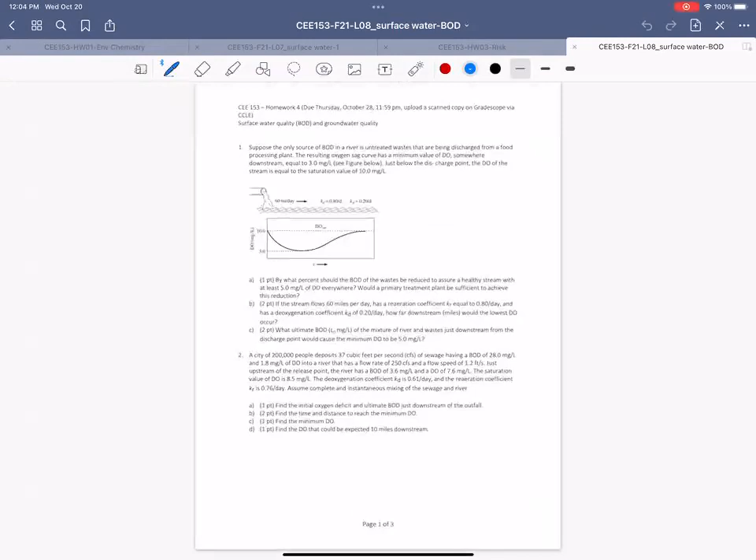And this is the homework. It's very hard to see here on the screen, but I just want to say that this is uploaded. These are all based on BOD. This is groundwater. This is also groundwater questions. So those questions, you know how to solve after Monday class.

All right, so the reason we do BOD is for this question. The picture that you see over here describes what happens if you have lots of wastewater or waste dumping into a river. As you can see, fish in the very left corner are very happy because they have enough oxygen. There are different kinds of fish, everybody's thriving there. But the moment you discharge some waste, those wastes have so much BOD that microorganisms will eat that BOD. In the process,

There is a noise here. It's for me. Yes, because of probably this. See, sometimes it happens, sometimes it doesn't. Try to put it at the bottom. It's a noise from the microphone.

All right, so as you can see over here, the moment you add more BOD, or waste that has lots of oxygen demand, the oxygen concentration is going to decrease, and a lot of fish will not survive. Only the bottom feeders, the fish that thrive eating the mud or things in the mud, will survive because they don't need that much oxygen. But all the other types of fish will die.

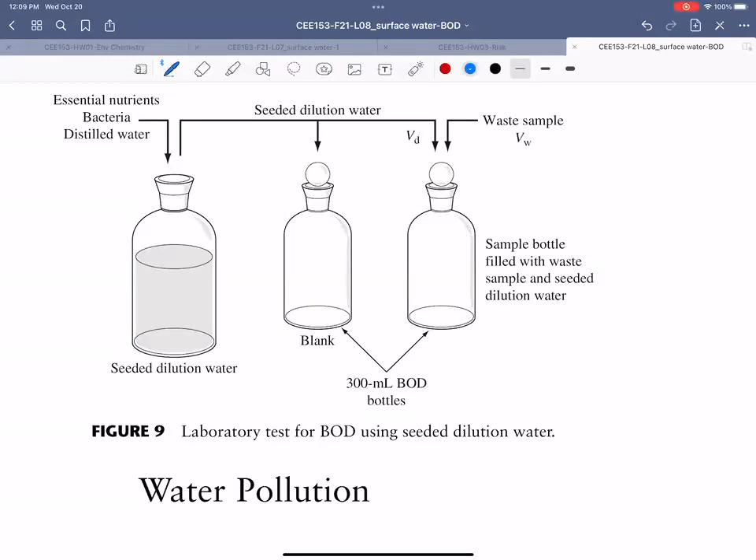The BOD test is basically: you take the waste, you don't know how much BOD is there. You start the test, and you measure how much dissolved oxygen is used up in 5 days. The dissolved oxygen used up is proportional to the BOD used up during that time. So you can calculate the amount of BOD based on the amount of dissolved oxygen used up, and that is the amount of BOD used up during that time.

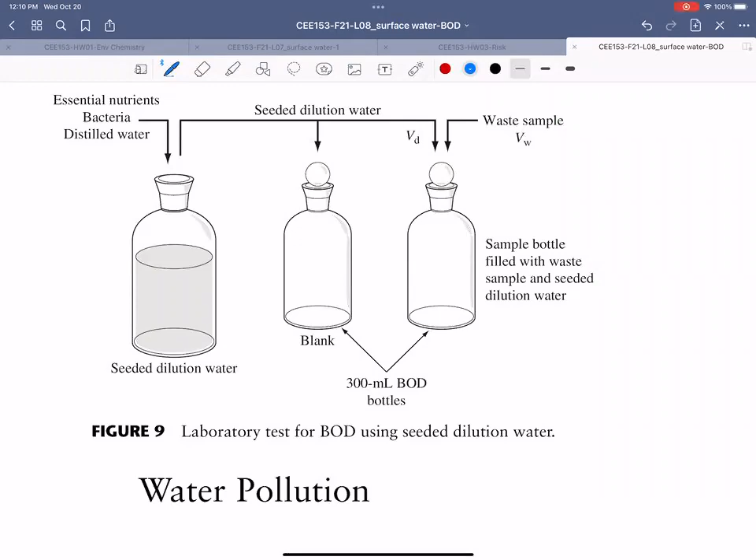But how do you know exactly what the BOD was before that? That's the first challenge. The only thing you can measure is how much BOD changed, not what was initially there. So you need some kind of equation to predict what was initially there. It turns out it's a first order differential equation, a first order rate, something you already solved. So I'm going to show how it is done, so you can use it a lot of times.

Every time you see BOD 5, that means BOD used up in 5 days. It's not the BOD concentration in water. That's the biggest mistake most students make in the exam. I give BOD 5, they assume this is the BOD in water. This is not the same thing. BOD 5 means they take that water, do the testing, and see how much BOD is used up in 5 days. So you can use that to predict the initial BOD. That's the first thing you have to change in your problem.

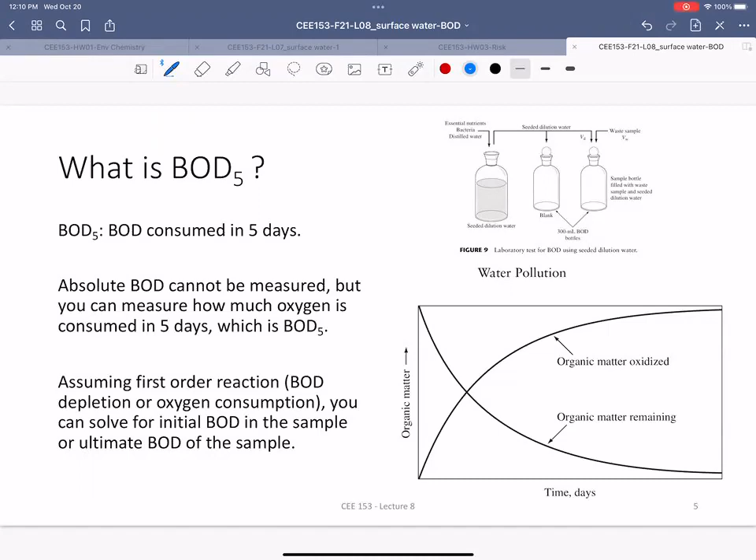So again, absolute BOD cannot be measured. You can only estimate it based on how much BOD is consumed in 5 days. So the BOD 5 test is the only test you can use to predict that BOD. So let's see how to do it. Modeling BOD reactions: the assumption is this is first order.

The amount of dissolved oxygen used up is the same as the amount of BOD consumed. Okay. So whatever amount of oxygen is used up must be because of the BOD depleted during that time, or BOD oxidized. The amount of BOD oxidized is basically the change in BOD concentration with time.

So you can write that as BOD at time equal to 0 minus BOD at time t, over t minus 0, the difference in time. Sorry, I'm writing it. It can be any time, but most BOD tests are only 5 days. So all we are measuring is the difference in BOD over 5 days based on the oxygen. So what you are measuring here is oxygen.

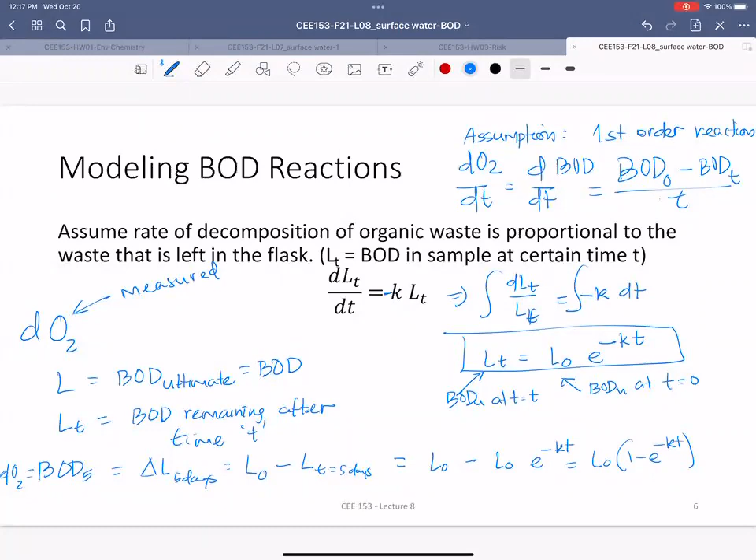So if you put it here, BOD5 is L0 minus L0 e to the minus kt. So if you take L0 common, you get L0 times 1 minus e to the minus kt. So why is it important? Now this entire expression can relate BOD5 with your initial BOD L0. Okay, so that means if the BOD5 is given and I ask the question, what's the amount of BOD initially present in the water? You can calculate L0. Okay, so the equation that you always use if the BOD is given: L0 is BOD5 divided by 1 minus e to the minus kt, and t equal to 5 days here. Okay.

So many short questions will give BOD5. You are asked to calculate this, or you will be given this one and you are asked to calculate BOD5. Everything else will be given, right? k is always given. And the important thing is the unit of k should be 1/day. Okay, that's the unit of k, because here the time is in days. So if the unit is given in a different time, let's say hour, you have to change to day to use that equation.

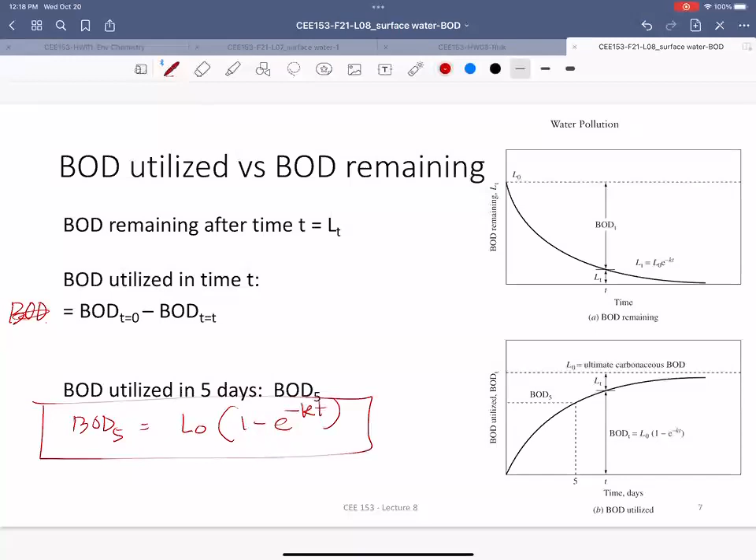So this is already derived. So BOD utilized in time t is the same as BOD5. So if you use this equation, BOD5 is this, and if you plot this equation, this is the amount of BOD in water at different time. It's decreasing with time exponentially because of these equations. And this is the BOD utilized, or amount of BOD used up. Initially 0, then it's increasing with time. If t equal to 5, that's a special case: what is the amount of BOD used up in 5 days? All right, so the only equation you have to remember is this. Everything else you already know.

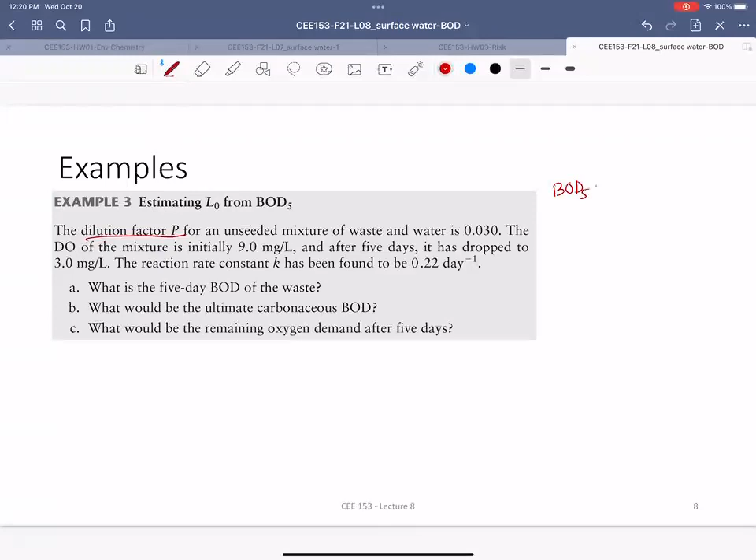I'm just going to write that equation there so that you know what equation to use. So BOD5 is DO initial minus dissolved oxygen final divided by dilution factor. So this is P. Everything else is given. DO initial is 9 milligram per liter. DO after 5 days has dropped to 3.0 milligram per liter. That's DO final. Divided by P, which is 0.03. So that would be 6 divided by 0.03 milligram per liter. So that's 200.

So all it means is that in 5 days in that test, 200 milligram per liter of BOD is consumed, which is basically equivalent to DO. 200 milligram per liter DO is consumed. Okay. So we express BOD as dissolved oxygen because you can't really have molecular structures or a specific formula.

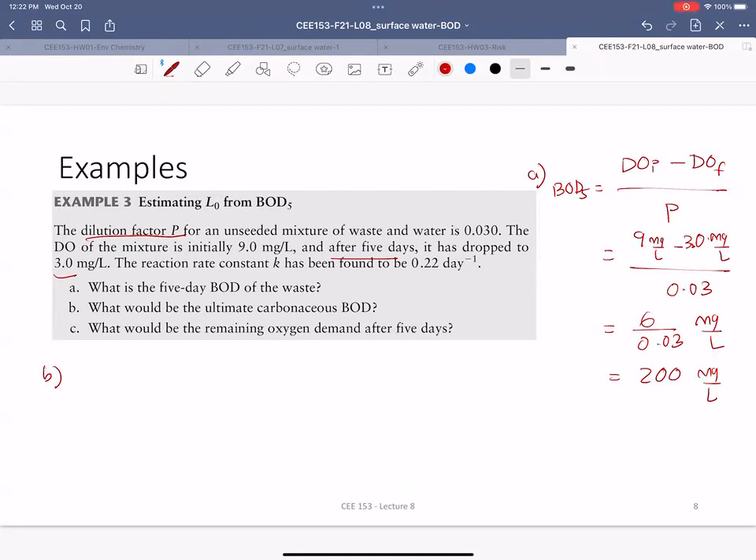Let's solve question B. What would be the ultimate BOD? Anytime you see ultimate, that's basically asking what is the initial BOD. So I'm asking you what L0 is. You know L0 is BOD5 over 1 minus e to the power minus k times 5 days. So that will be 200 milligram per liter.

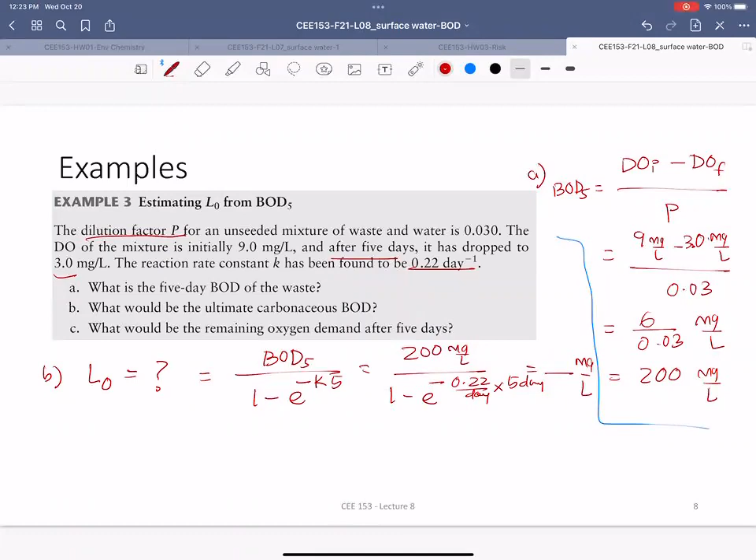K is given, 0.22 per day, and this is 5 days. So I'll get the answer in milligram per liter. So again, anytime you see ultimate BOD, that's basically asking what is the concentration of BOD in water, not what is consumed in 5 days. So this is basically, before the test started, what was the initial BOD.

Number C, what would be the remaining oxygen demand after 5 days? So it's asking how much BOD remains in water after 5 days. L0 is the starting point, initial. What is LT at 5 days? Well, that's easy. You know what is initial and how much you consumed. So if you subtract BOD5, whatever was consumed in 5 days, from the initial, you get what was remaining.

But another way you can write it: this equation is the same, because you know the BOD decreases with an exponential function from the initial number, and if you put this value in, you can see it comes out the same way. So BOD5 is L0 times 1 minus e to the minus k times 5, that's the BOD5 expression.

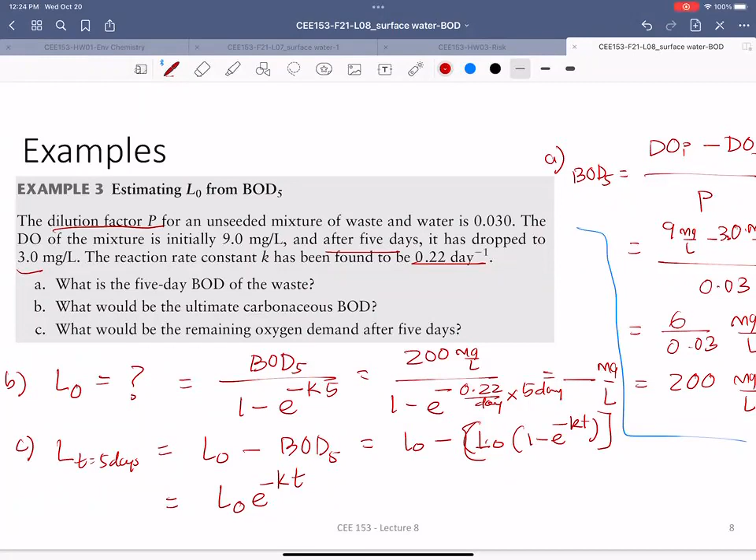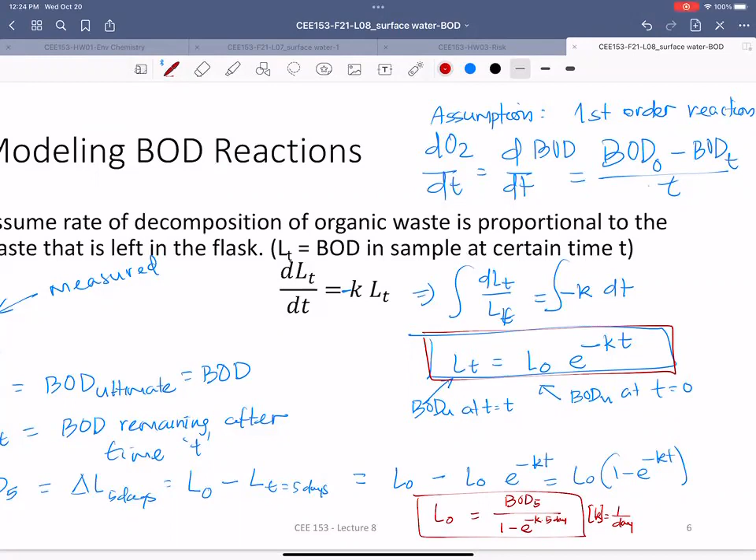If you put that value in, L0 cancels, so the only thing you get is this value, which you already knew before. If you see the previous equations, we already knew how to predict BOD at different times if you know the initial amount. In this case, it happens to be 5 days. Okay, so that's the L0 value. You calculate that; everything else is given or estimated.

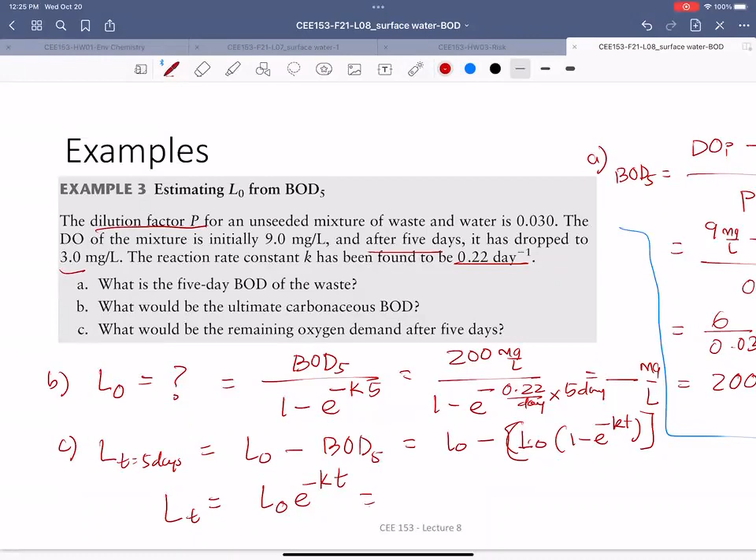So this is a very good example of calculating based on what is given. Usually K is always given, okay? And in the short questions, mostly one term in this equation will be missing, so you'll have to estimate the missing term by just plugging in the values. From now on, you will not be asked to derive any equations. You just have to know which equation to use, and you already know where the derivation comes from.

One other thing is that the BOD rate is basically how quickly the bacteria use oxygen. It depends on many factors. One factor is temperature, because in winter the temperature is low and bacteria are not so energetic, so they don't use oxygen as fast as in warm water. That's why warm water stinks a lot faster than cold water, and that's the reason you refrigerate everything, because it slows down the rate.

A lot of times the rate constant will be given at a different temperature, and you have to estimate it at other temperatures using these equations. KT, it's hard to see, so I'm going to write it here. At any temperature you can predict it if you know K at 20 degrees Celsius, because most laboratories are at 20 degrees Celsius; the air conditioning in the room is roughly 20 degrees. You just have to extrapolate what that rate would be at a different temperature.

So that's this theta. Theta is a constant, raised to T minus 20. So this is at different temperatures. The theta value is given; you can check the book for the number, and you can always assume it's the same theta. It's usually estimated using a laboratory experiment. Theta is a constant. Check the book for what that number is.

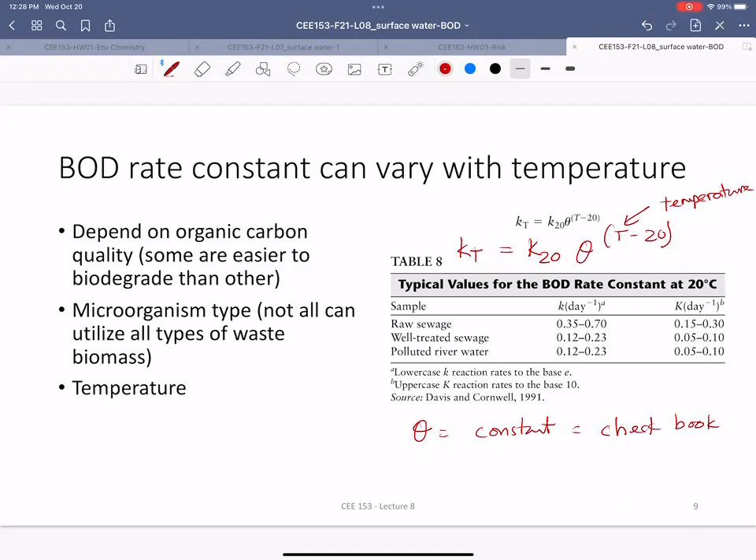It also depends on the type of organic carbon, because organic carbon is BOD, right? If you dump a lot of plastic, your BOD is 0, because plastic will not be eaten by bacteria, even though it has lots of carbon. So the type of organic carbon, or biodegradable carbon, is also a factor.

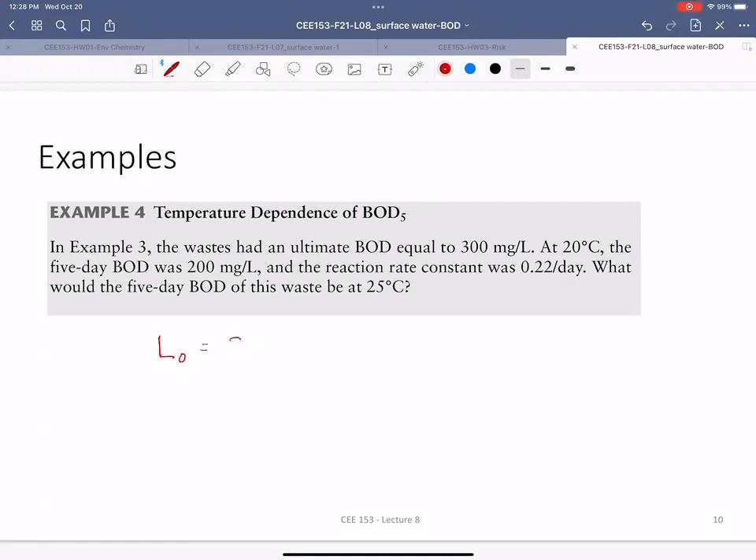So another example of how you can use what we just learned: it says the waste had an ultimate BOD, so that means L0 is 300 milligram per liter. At 20 degrees Celsius, the 5-day BOD was 200 milligram per liter. So say BOD5 is 200 milligram per liter and temperature is 20 degrees Celsius.

The reaction rate constant was 0.22. So the KR at 20 degrees Celsius is 0.22 per day. What would be the 5-day BOD of this waste if the temperature is 25 degrees Celsius? So what is the BOD5 at temperature T equal to 25 degrees Celsius?

So the BOD5 equation is basically L0, this is the BOD5 equation. Okay, BOD5 equals the initial concentration times 1 minus e to the power of this, right? But this K is at 25 degrees Celsius. In this case, you are not given that K. You are asked to calculate the K. So all I'm asking is what is K at 25 degrees Celsius.

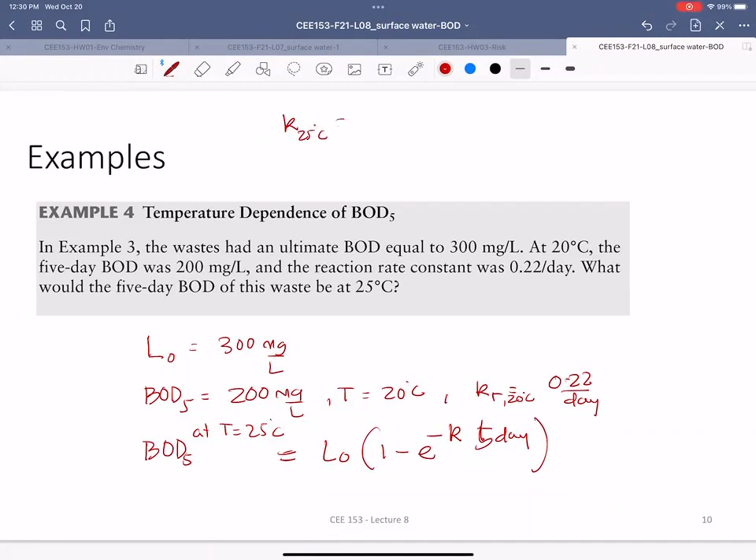So based on this formula, it's basically K20 times theta to the power of 25 degrees Celsius minus 20. For theta, check the book for what the number is. Then you get that K and put the value here, and you get the answer. Okay, so the only thing missing was the K value at 25 degrees Celsius.

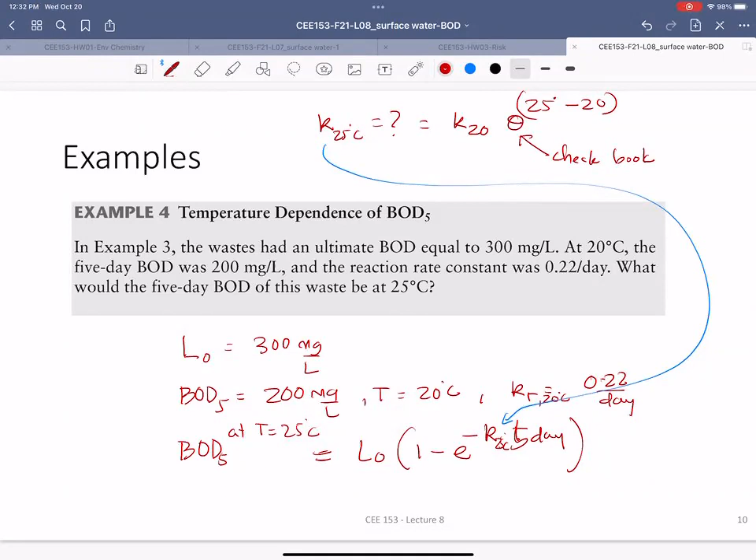Yes. Theta is a constant, an empirical constant determined by laboratory based on what microorganism, what BOD types, all that. But for this class, whatever number you see in the book, always use that if it is asked. Again, these are examples from the book, so the solution is given in the book itself. I'm just doing it in the class.

All right, so this is the main thing that we are here for: how do you predict the BOD concentrations once you discharge waste? This is the river problem. It's called the oxygen deficit model. It means how much oxygen is being used up if waste is discharged into a river, and how far from the waste discharge point the oxygen concentration will be the least. That's the danger, right? You don't want that to happen very close to your home. So that's what we are going to predict.

So this is just a picture that shows wastewater is dumped into a river and then it moves as a PFR. So the whole waste is moving as a PFR, so this problem is a PFR problem. The only difference here is the pollutant is now BOD. You solved this kind of question before, so you can solve many questions like that again. The only difference is the BOD concept.

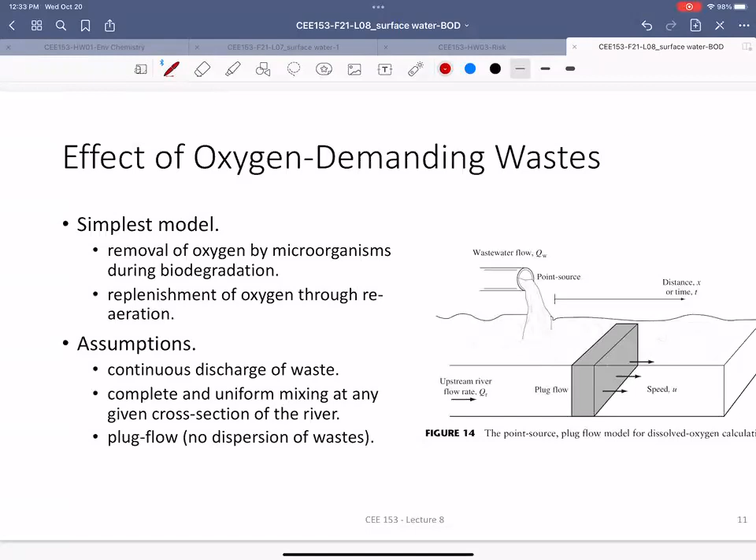So again, it's the same assumptions. It's a continuous discharge, so the flow rate is constant. It's a completely mixed system: the moment it mixes with the river, the concentrations are quickly mixed. So you can estimate what the concentration of the waste would be after that mixing. And this is a PFR reactor.

Now, as I said, we are interested in BOD, but mostly because we want to know the oxygen concentration at different points. So what determines the oxygen concentration? There are two reactions that determine how much oxygen is in water at different locations. Number one, dissolved oxygen will be utilized by bacteria consuming that BOD. The chemical is being oxidized, and as it goes further, the bacteria are using up oxygen. This is what we just learned.

Okay, so because of the chemical, the oxygen concentration is going to decrease, but that's true for a closed system. In the BOD test in the lab, they close it completely, so there is no oxygen coming from the atmosphere. So the BOD concentration decreases exponentially.

But that will not happen in nature, because it is exposed to atmospheric oxygen, and the atmosphere has 20% oxygen. So the moment it sees that there is a gradient or difference in concentrations, it will start coming in. And how much oxygen is coming in is based on Henry's law. We learned that last class. You know that from the Henry

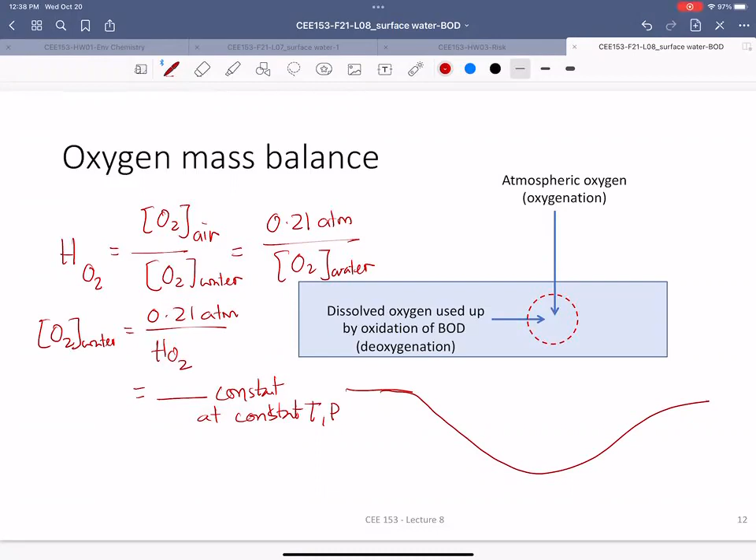The oxygen sag curve is like this. What it means is that the oxygen concentration will decrease initially because the supply is not as much as the demand. And the supply is always there, and that depends on the deficit, how much difference in oxygen is there; that will drive the reaction. So that's the only concept. Everything else you know how to solve. So I'll just show you how to do it.

Okay, so how much oxygen is being used up is the same thing as how much BOD is being consumed. So we just solve it. The rate of deoxygenation, meaning removing oxygen by BOD, is the same as the rate of BOD consumption. So as you see, the oxygen concentration decreases and the LT concentration are opposite, right? If you have more chemicals, there is less oxygen. So that's why there is a negative sign there. If you correlate them together, it becomes positive.

So this you already solved. That means you can write the rate of deoxygenation, and LT you already solved before: L0 e to the power minus Kt. So this is the rate at which oxygen is being used up. That's basically the same as the BOD reaction, and you did it before. But now the second question is how much oxygen is coming from the atmosphere. That's the second equation. Then we just combine them, solve it, and you get the answers.

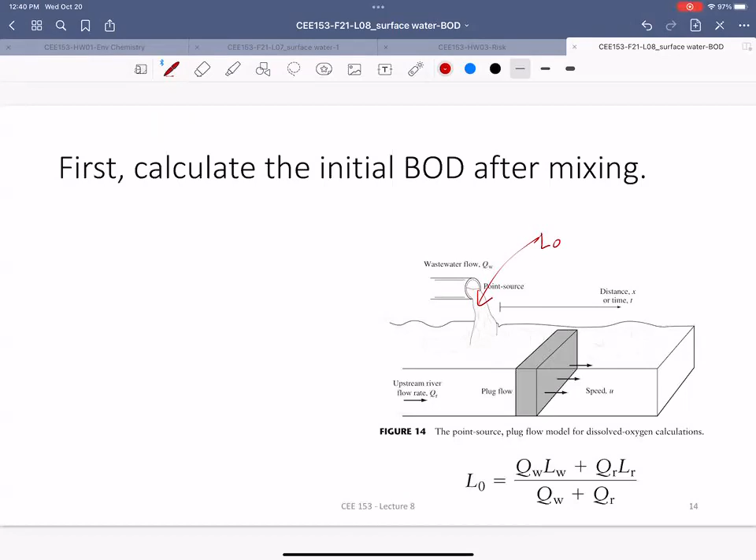But before you do that, as I said, the waste is dumped here. This is not the waste that is moving. That waste is diluted by the river. So first you have to estimate the actual waste in the river after they are mixed, right? Because this reaction takes place after they are mixed in the river water. So you know this is LT, this is L0. But what you are given is L0 in the wastewater.

What you have to calculate is the BOD in the river after mixing, because that's what is going to react with the river bacteria. So what is L0 after mixing? L0 is the ultimate BOD after waste is mixed with river water. So if you write that equation, this is the river flow and this is the waste discharged. Let's say QW is the waste flow from the wastewater treatment plant, and the BOD concentration in that waste is LW.

And then this is river coming, this is river flow. Upstream, you know that this is QR. And the concentration of BOD in the river is LR, because there will be always some BOD in river water. It's not completely clean. There will be always some organics.

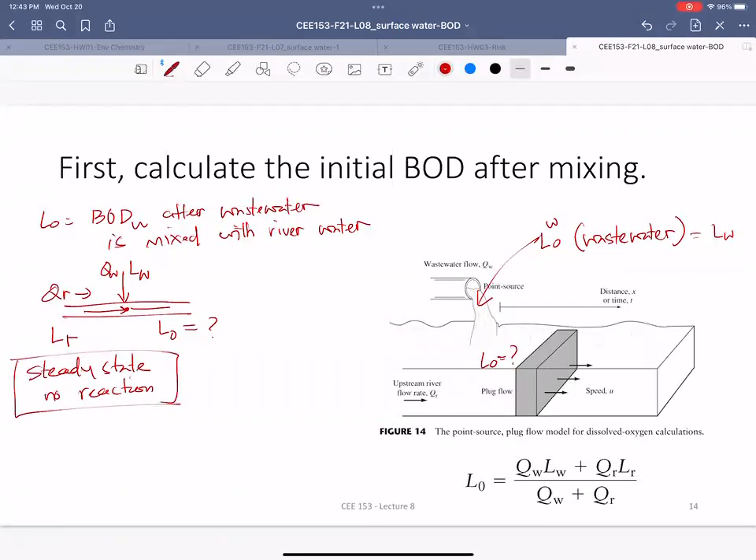So if you make this assumption, at that point the mass balance equation is basically Q in C in is the same as Q out C out. Whatever is coming in should be mixed together to become whatever is leaving the system. So what's coming in is QW LW, that's the waste coming in, plus the mass of BOD coming through the river directly before the waste is there. So that's QR LR. Here LR is the concentration.

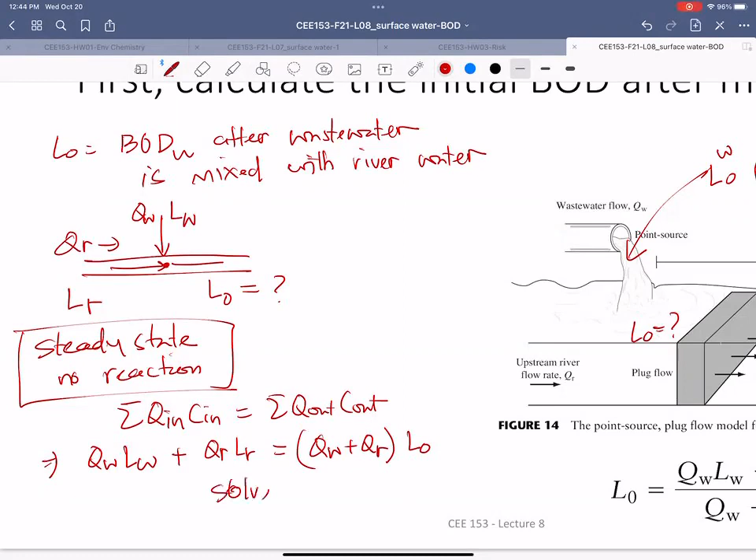Concentration term. And then Q out. Q out is basically these two flows mixed together, so the flow rate is going to increase a little bit. So that's going to be QW plus QR. That's the mass balance for just water. And then C out, what is coming out, is what you are predicting. So if you solve for L0, just rearrange the equations, you get this answer.

So if the question is given, you don't have to solve any of this. You just have to directly write that, because it's becoming repetitive and you know how it comes there. When there is wastewater and it says it's being mixed, just write the final equation. You don't have to show how it got there. If I ask what is the concentration of BOD after mixing, just start with this. From now on, you don't have to derive everything because you already know it. I'm just showing here so you know how I get there. In an actual question, you can just write this and plug in all the values given.

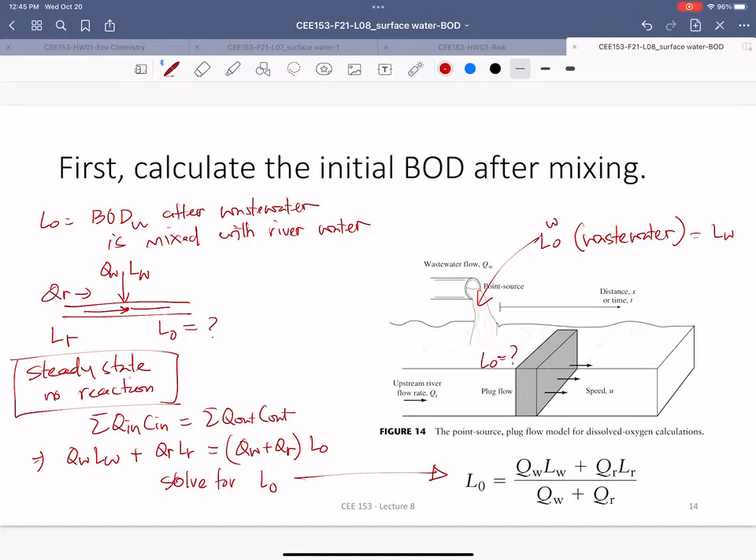Unless I ask you to derive in the midterm, which I never ask, you just have to identify the right equation, put it there and solve for the unknown. At least for this kind of question, the BOD. From now on, every chapter, you don't derive anything. You learn how to derive it in class, but you don't need to derive it in your homework.

All right, let's solve one question before we take a break. A wastewater treatment plant serving a city of 200,000 discharges 1.1 cubic meters per second of treated effluent having an ultimate BOD of 50 milligrams per liter into a stream that has a flow rate of 8.7 cubic meters per second and a BOD of its own equal to 6 milligrams per liter. The deoxygenation rate constant is 0.2 per day.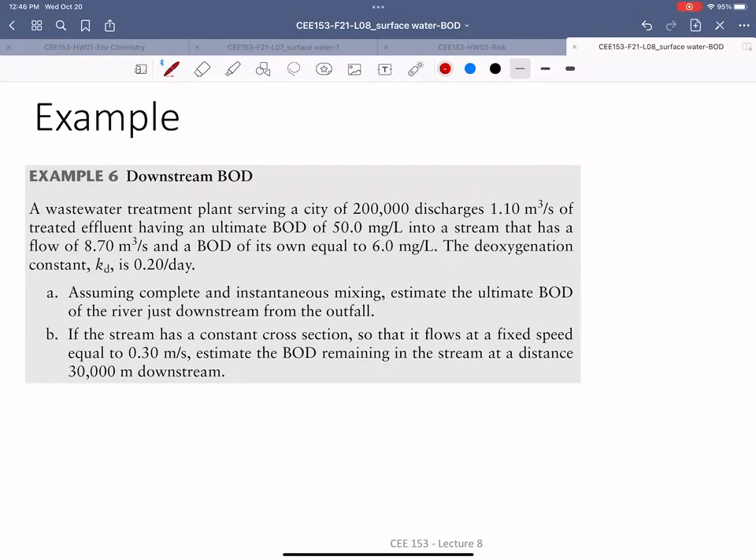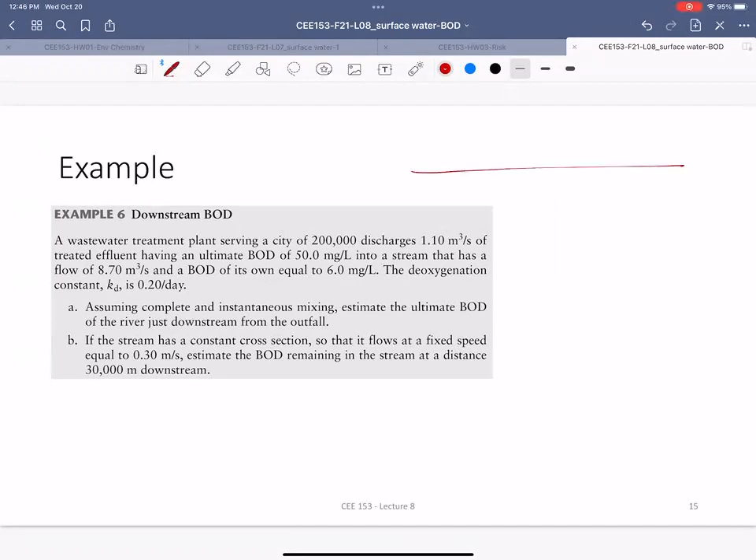Let's see what's given here. Again, always draw the figures. There is a stream moving. That's the stream. The flow rate of the stream, Q stream, is 8.7 cubic meters per second. The concentration of BOD in the stream, let's write LS, is 6 milligrams per liter.

And then there is a city that discharges wastewater into that stream at a certain flow rate. So Q waste is 1.1 cubic meters per second. And it says its BOD is 50 milligrams per liter, so L waste is 50 milligrams per liter.

Any time you read these questions, always check whether it's ultimate BOD or BOD5. If it says BOD5, you have to first calculate ultimate BOD. That's the one mistake almost everybody makes if they don't pay attention. Ultimate BOD is the actual BOD concentration. BOD5 is not the BOD concentration. You are solving for BOD concentration, not BOD5. Here you don't have to worry, because it doesn't say BOD5 anywhere. It says ultimate BOD.

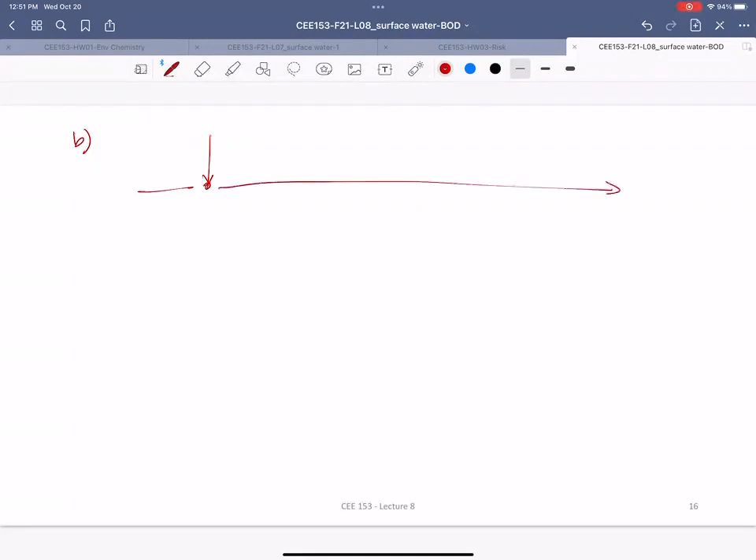Then it says if the stream has a constant cross section so that it flows at a fixed speed of 0.3 meter per second, estimate the BOD remaining in the stream at a distance of 30 kilometers or 30,000 meters. So let's simplify what is being asked. All mixed up here. Okay, the waste is mixed up, and then it's moving here for another 30 kilometers or 30,000 meters.

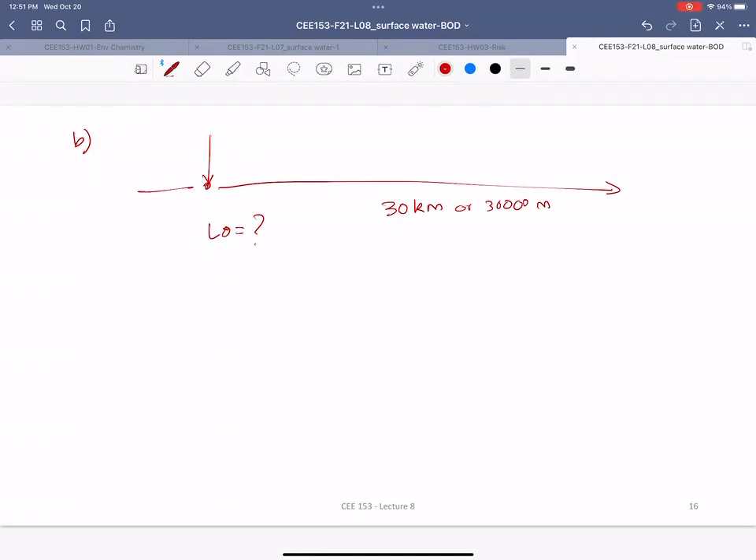So you know what is the L0, or the contaminant concentration at the start. Then that contaminant will move 30 kilometers, and I'm asking what is the concentration after that move. In the time when it's moving, it's being reacted. So this is a PFR. Basically, I'm asking a PFR question.

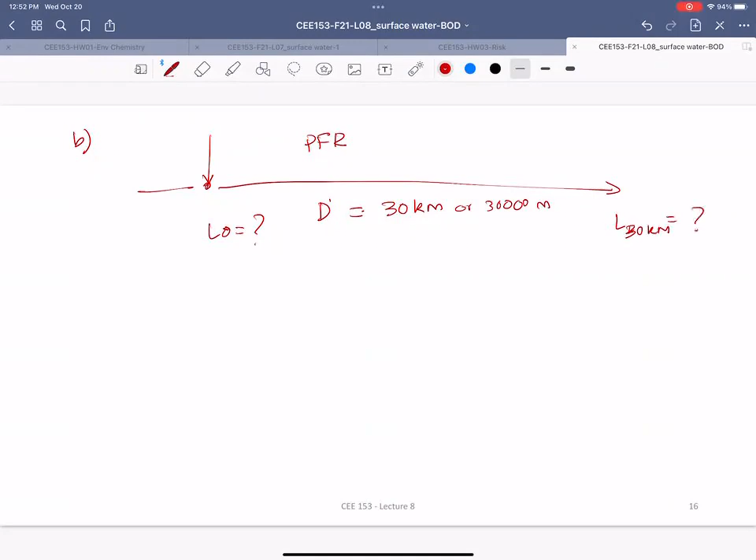L is given as the length, so I'm going to write it as a distance, because now L is used as BOD, so the notation might be different. So I'm just going to write capital D for distance. So I'm asking what is the L value at 30 kilometers. And the rate is given. The rate is the same thing because you can assume the KD. Okay, so this is the PFR equation. All I'm asking is how much is remaining after that whole waste is moving at the same speed.

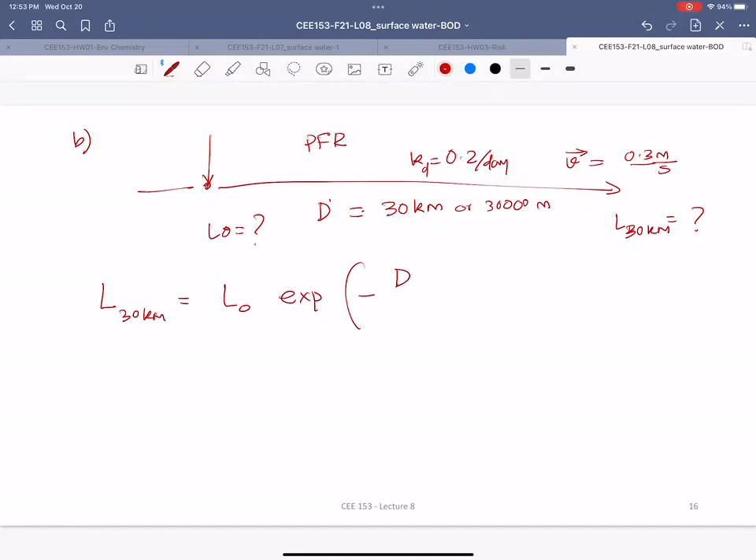So the velocity of water here is given, 0.3 meter per second, and the cross-sectional area is not given. All right, so it's a PFR question. So you know what is the concentration of any pollutant when it moves in a pipe or a river after a certain distance. So let's just write the equation directly. So concentration at 30 kilometers will be the concentration at 0, and if you look at the PFR equation, it's distance times area of the cross section over Q.

Is this correct? There is something missing. There is a K somewhere, right? It's a K here. Is this the correct formula? Yeah, basically KT, and T is volume divided by flow rate. Okay, so that volume is length times the cross-sectional area. So this is Q downstream. In this equation, if you divide flow rate by area, it's the same as velocity. If you divide flow rate by cross-sectional area, that's the flux or the velocity.

So that means you can write L0, and everything else is given. So L0 times e to the minus 0.2 per day. Distance is 0.3 meter per second. Oh, sorry, distance is not that. Distance is 30,000 meters. Velocity is 0.3 meter per second. This is in day, this is in second, so you've got to change that unit.

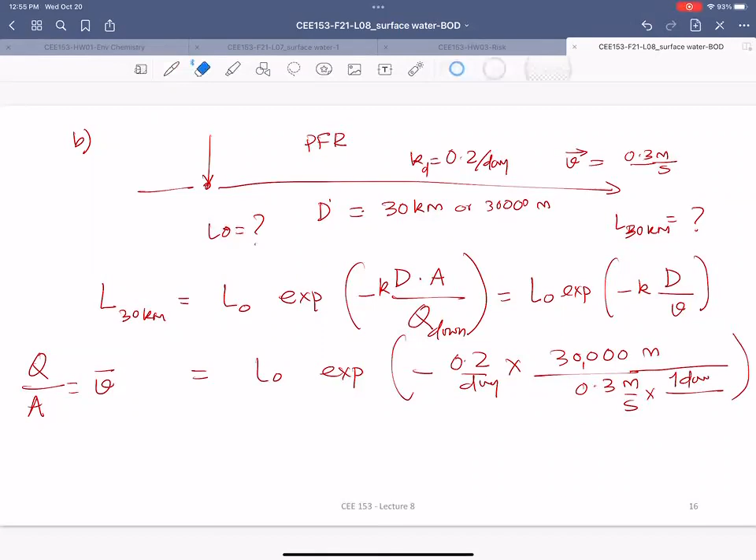One day. Oh no. One day is the same as how many seconds? That is a big number. Forgot. 24 hours times 60 minutes times 60 seconds. L0 is calculated from part A. Then you get the number.

So as you can see over here, we are constantly using the PFR equation, so there is nothing new here. You already solved this question in homework 3. We are doing the same thing in homework 4. Okay, so it's not any different. The only difference is the concept of BOD, BOD versus BOD5. As long as you understand the BOD concept, you should be able to solve exactly the same thing without any extra knowledge.

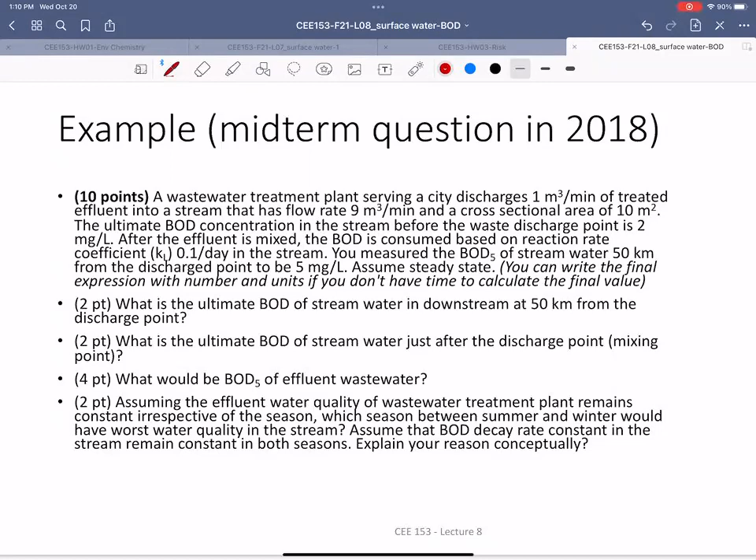So sometimes it says BOD, sometimes it says BOD5, you've got to pay attention to that. When I'm asking BOD, that's the BOD ultimate. If I'm asking BOD5, you know what that means. You just have to plug in the equations and get the BOD5 from BOD ultimate. So as you see, the questions in midterms are exactly like the example question we solved, with just a little difference here and there.

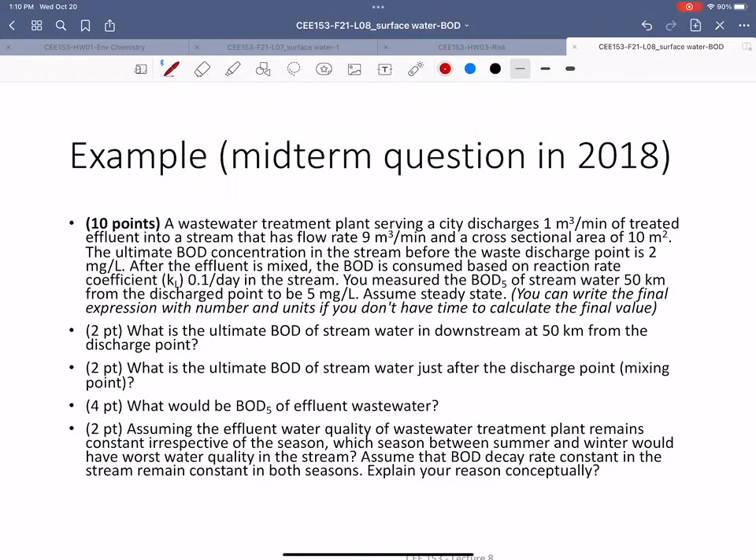So I just want to put it there so that you know this question is on the slide. You should try to solve it after this class because we already solved similar examples. That way you are prepared to solve at least one question if it is on BOD. Okay. In my experience, students who solve all the homework questions many times never receive less than 90% in the midterms. At least in the long question, they all get full credit.

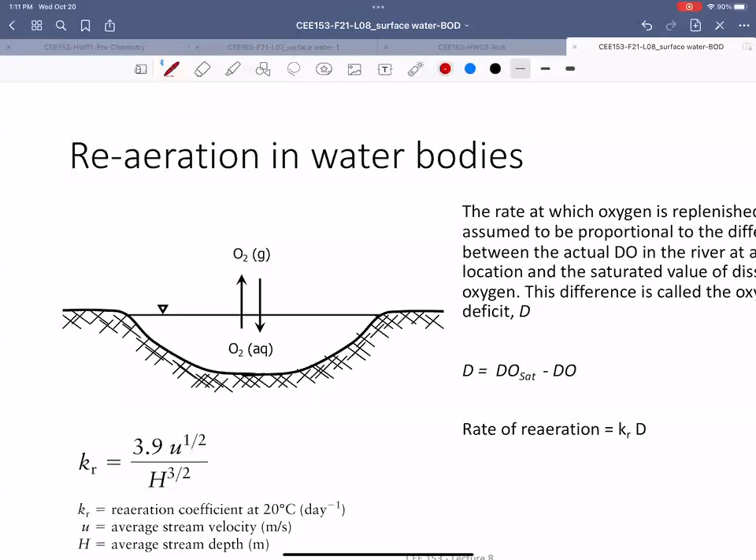The questions where they lose points are the concept questions. I'll give you one right away here. This is a concept question because it asks how much oxygen can get into water based on certain variables. So this is basically the re-aeration rate, the amount of oxygen that comes from the atmosphere to the river at any time. As I said, what drives it is the deficit, because BOD is consuming that oxygen, so there is a positive pressure from the atmosphere. There is less oxygen in water than what the atmosphere wants based on the Henry constant.

The deficit is the maximum oxygen that can be present in water if there is no waste minus the actual concentration in water. And this actual concentration of oxygen is because of the BOD or chemicals in water. So this deficit is what drives the amount of oxygen that can dissolve in water. If you have more deficit, more oxygen will diffuse into water from the atmosphere because it's an open system.

First it depends on the deficit, and second it depends on the rate at which oxygen can diffuse into water. That depends on how much water is exposed to oxygen. Because if you see river water, the atmosphere is just on the surface. So the water on the surface is touching the atmosphere, not what is inside. They do not have access to atmospheric oxygen. So the oxygen has to diffuse into the water for it to be completely saturated, and diffusion is a very slow process.

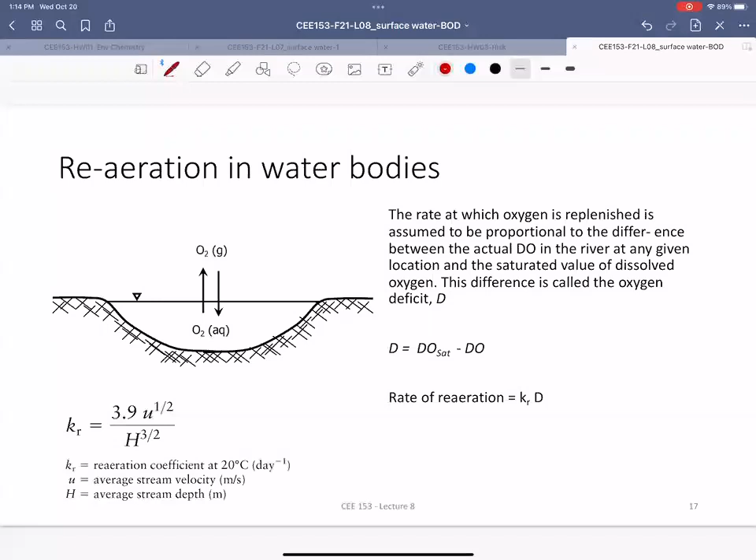All right, so KR is the re-aeration rate. Again, that changes based on the different type of surface water. If it is a small pond, the rate of oxygenation is very small because you don't have the velocity to mix up. But as you go to a stream which is very turbulent, you can see the oxygenation rate is much higher. That's because of the depth as well as the velocity of the mixing.

Rapid waterfall. That's why anytime you see a waterfall, usually that water is very clean, because all the water is mixed with the atmosphere. It's falling through the sky, right? So that's why you can see the rate of oxygenation in a waterfall is much higher. In fact, this is the reason.

If you see how the wastewater treatment plants are designed, they are trickling the water; it's called a trickling filter. Basically, they put a lot of rocks and let the wastewater slowly percolate on the rock. And that's how it basically helps the oxygenation.

A lot of times when you don't have these big rocks or the space to make those trickling filters, they just pump oxygen or air into it. So they just have a big blower pumping air into it. And those are very expensive. In fact, 90% of the energy requirement is because of this oxygen supply, the pumping rates.

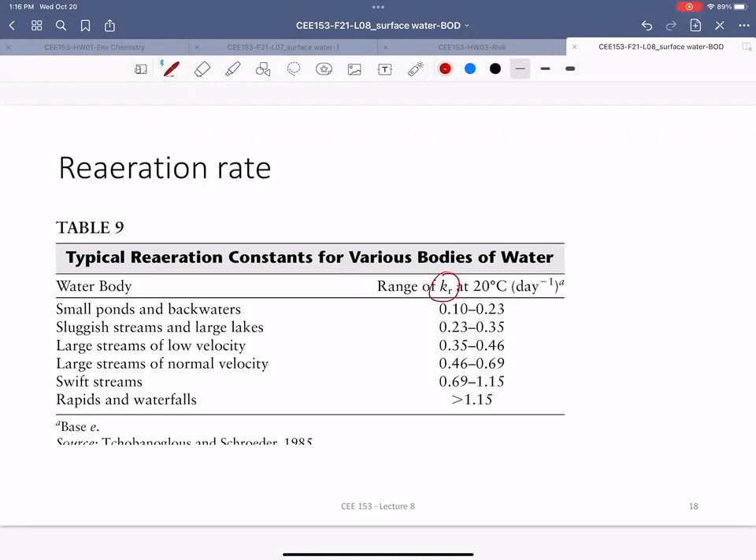All right. So now, if I give a question, you know how to get the KR. Usually KRs are given. Now we have to solve these questions about deficit. Rate at which oxygen is transferred from air into stream. What's driving that oxygen concentration is the deficit. And deficit is basically oxygen saturation, which is based on the Henry's law constant, minus the oxygen remaining in water because of BOD.

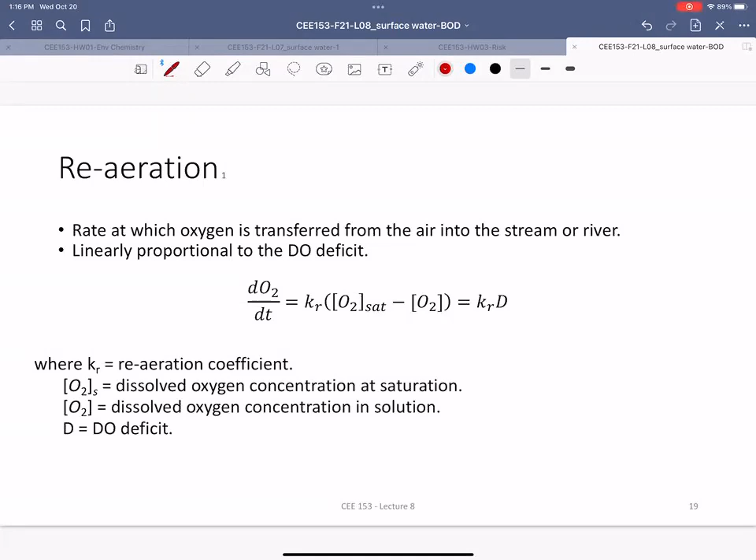So now that you know this one, let's solve these questions. Initial oxygen deficit. A wastewater in example 6. Oh, where is example 6? Did I solve it? Yes, we solved these questions. Has a dissolved oxygen concentration of 2 milligrams per liter. So DO concentration. This is DO. The discharge rate, this is not velocity, this is the flow rate, Q waste.

A river that is receiving the waste has a DO equal to 8.3. So this is a river. You have wastewater being discharged, QW is 1.1 meter cube per second, and DO waste is 2 milligrams per liter. Then the flow rate of the river is 8.7 meter cube per second, and DO concentration in the river is 8.3 milligrams per liter. The temperature is 20 degrees Celsius.

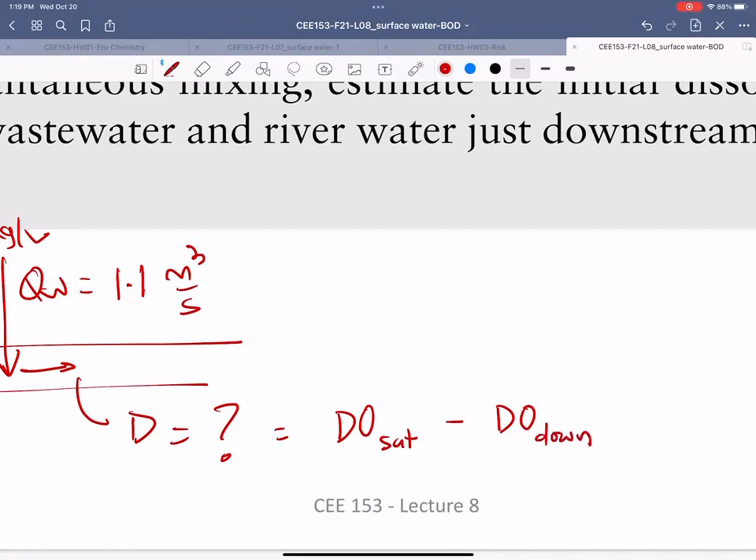Assume complete mixing. Estimate the initial dissolved oxygen deficit of the mixture of wastewater and river water just downstream. So basically I'm asking here what the deficit is. Here I'm not asking dissolved oxygen, I'm asking what is the deficit. Deficit means maximum amount of DO that can be present minus the actual present. That's the deficit.

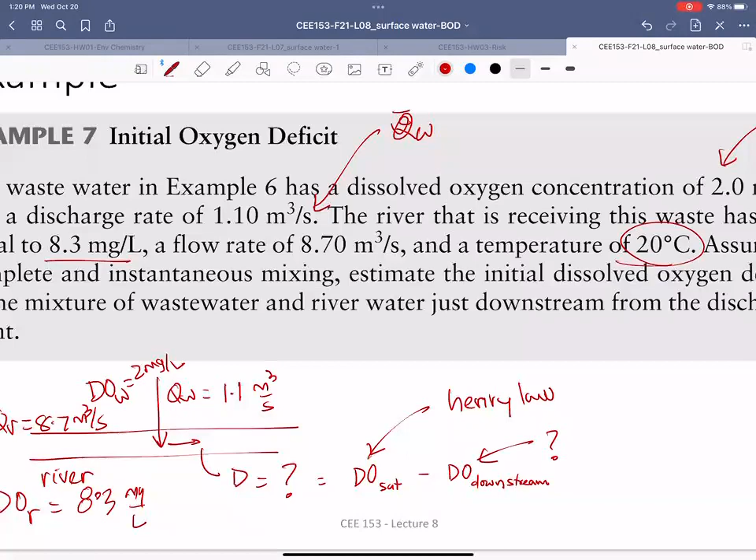DO sat you can predict based on Henry's law. You already know how to solve it. If you know the Henry's law constant at 20 degrees Celsius, you can solve it. We just did it a few minutes ago. What you don't know is the dissolved oxygen concentration just after it is mixed. But that you know already. Basically two DOs are mixed together and become something, right? So that's what the DO is here, after this DO is mixed with this DO.

Okay, so there is a stream with very low DO mixed with a stream or river water with a little bit higher DO. When you mix them together, it will be somewhere in between. So that's basically also a mass balance equation. So DO downstream, you can write the same mass balance equations.

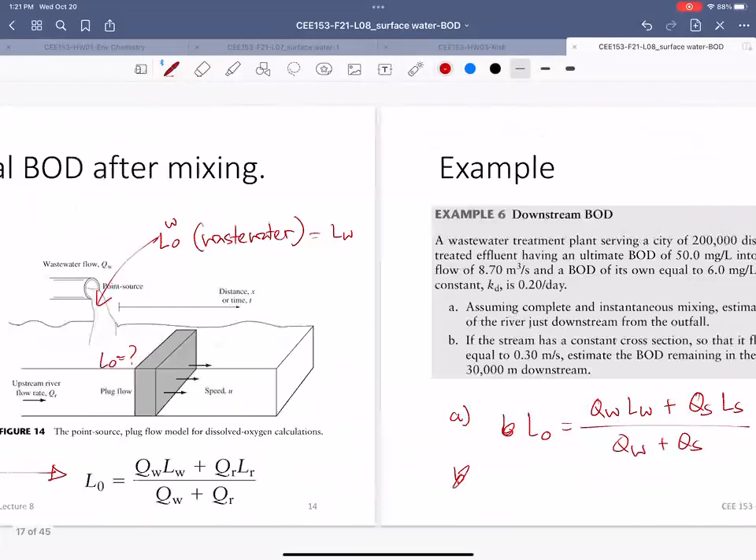It's the same way. QW DOW plus Q river DO river. This is the same mass balance equation; if you see the previous times we did this, it's the same equations. The concentration after mixing is basically whatever input here, the constituent you are looking for is DO as opposed to BOD. So again we keep coming back to the same point.

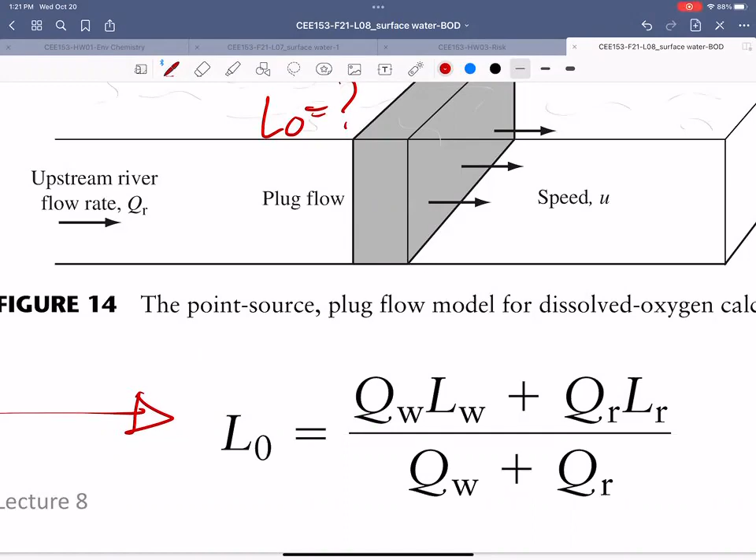So QW is what? QW is 1.1. Dissolved oxygen concentration is 2 milligram. QR is 8.7 meter cube per second times 8.3. So deficit is, okay.

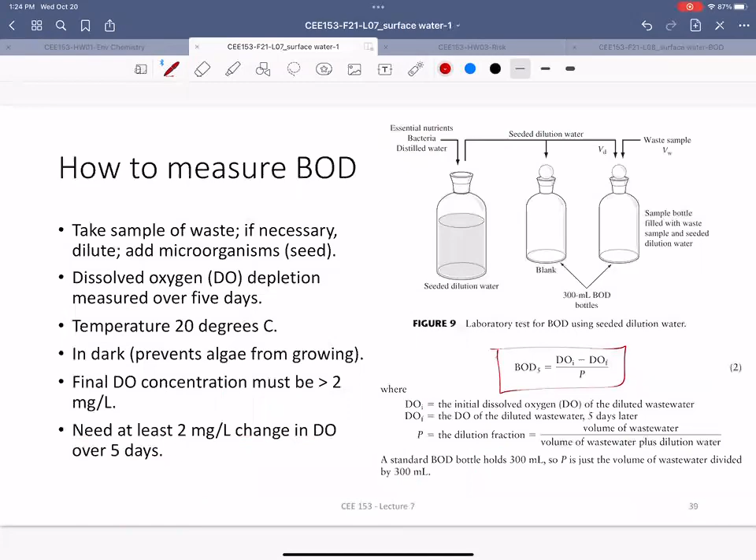So the answer you get is moles per liter of oxygen, but you know how to change moles per liter to milligram per liter, because 1 mole of oxygen is 32 gram of oxygen, which is 32,000 milligrams. So we solved the same question last class, so we know how to do it. If I show you the last class, somewhere we did it. Here. We already solved the same questions at different temperatures, plug the value, and you get the answers in milligram per liter.

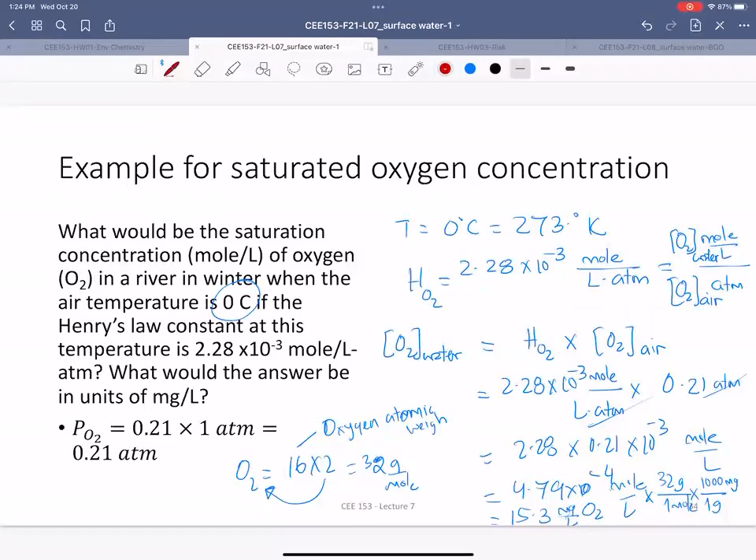Okay, so the last question, which is basically calculating the distance. And luckily, we don't have to solve these questions. You just have to write the answer. So deficit over time is a function of two things: what is driving the deficit, which is the amount of BOD in the water and the rate at which the BOD is being consumed, that's creating deficit, minus the amount of oxygen coming from atmosphere, which is decreasing the deficit. So these are the two terms we know.

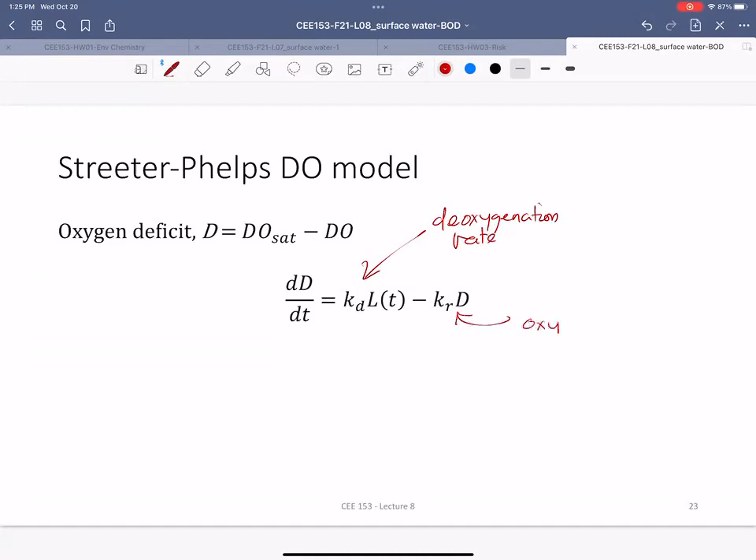So this is basically deficit is the deoxygenation rate minus reoxygenation rate. So deficit increases if you have more deoxygenation rate, means BOD is using up the oxygen. Deficit decreases if your atmosphere is providing more and more oxygen. Okay. So you know this value KD LT, LT is from L0.

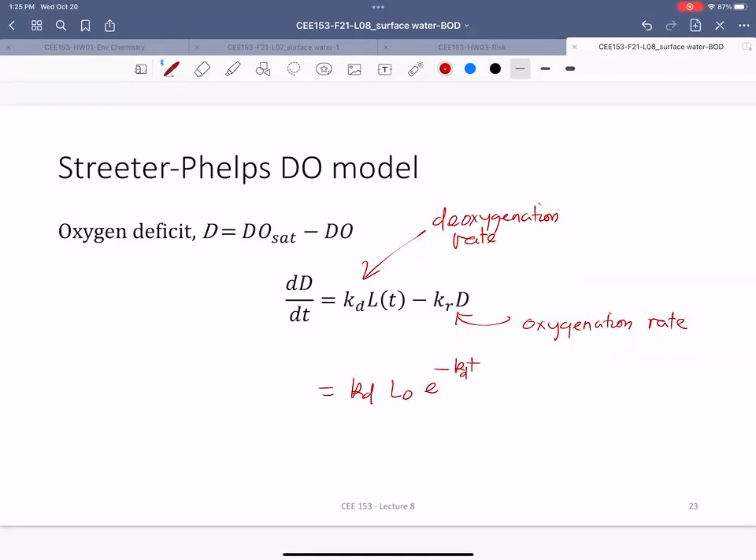So if you see this equation, the variable is D, everything else are constant. KD is constant, L0 is constant, KR is a constant. So there are two variables, D and T. So this is a linear equation, dD by dt. So think of dy by dx plus some constant times y plus some function of x. So I can write these equations plus some function of t.

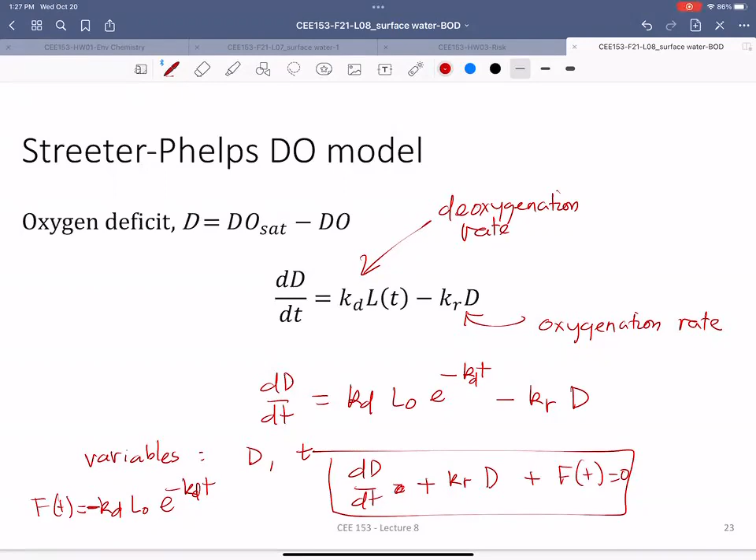Okay, this entire thing is a function of time, because everything else is constant. L0 is a constant, these are constants. So this is just a function of time, where f(t), I'm just defining that f(t) is equal to this. So if you put this equation in the websites where you can derive the solution, you'll get answers. Luckily, I don't have to derive because I don't expect you to do that. So this is the derivation. The answer is this.

Okay. So anytime you want to calculate the deficit, just start with these equations. Deficit is a function of deoxygenation rate, reoxygenation rate Kr, your time, and also the initial deficit. The initial deficit is how much when they are mixed together, which you just calculated in the last example. So if you put this initial deficit there, everything else is given to you. You can calculate how the deficit is changing with time. Okay.

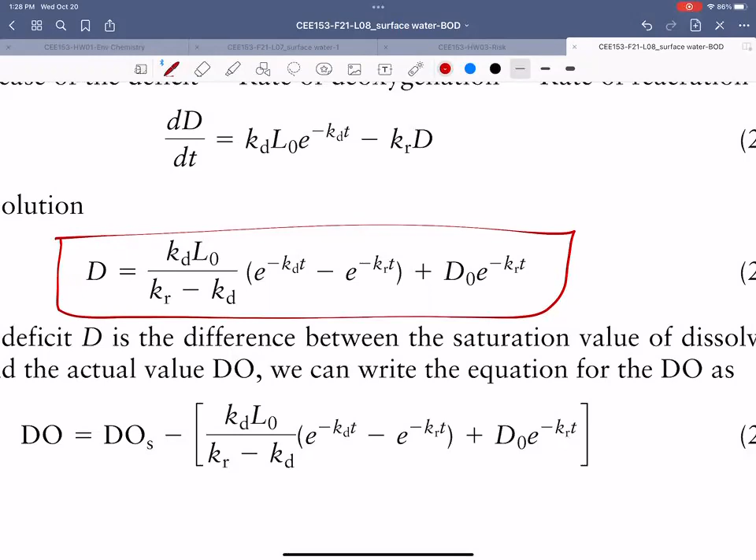And time, how do you know time? Time is basically how that water is moving. So that time is a function of distance, how far it has moved in the river. So time is basically distance over velocity, or another way to write it, where x is the distance from the mixing point, over the velocity of water in the river.

So that means if you don't know the time, you can just put this value x over velocity, then you can get the same equation as a function of distance. So you can predict the deficit if you know the distance from the discharge point. If you plug these equations in, not just solve in Excel, if you put this value at different x, you can get different DO or different deficit. So that's exactly what that answer is.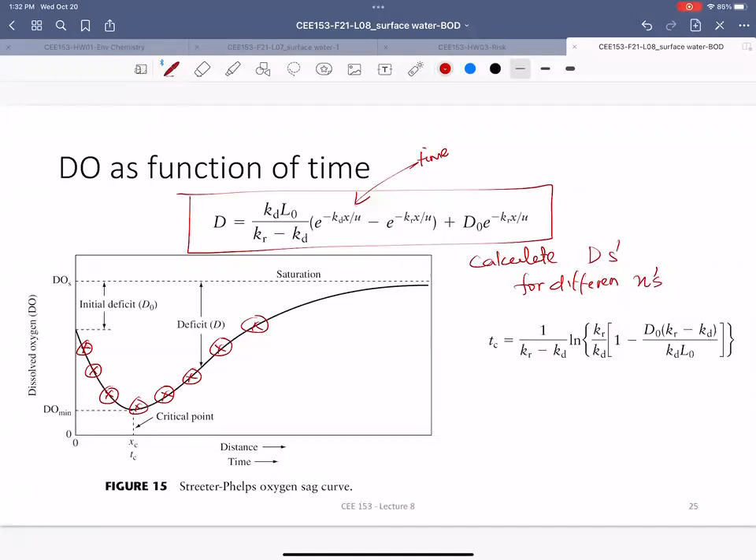And a lot of times you are asked to calculate the time or the distance where the concentration is the lowest. The way to calculate it is, if you see how the deficit is changing, it's first increasing, and then this is an inflection point. After that, the deficit is decreasing. So at this point, if you take the derivative of this curve, that's the calculus, this is equal to 0. That means at that inflection point, the critical point, dD/dt or dD/dx equals 0.

At x equal to xc. If you take the derivative, which is basically the slope, this slope is going to be 0 at that spot. So if you take the derivative of this one and put x equal to xc, you get these answers. You solve for xc. I'm not going to take the derivative, I'm just going to write the equation directly. You know what D is. If you take the derivative, you get these answers. So this is how it is solved.

So any time you are given a question, all these numbers are given to you. The only thing that's not given is the DO concentration at this point. Then you can calculate all these values. If you calculate the deficit, you know exactly what the DO is, because deficit is saturation minus the DO, and the critical time is this. So you just plug in the values. So let's solve an example so that you know how to do it.

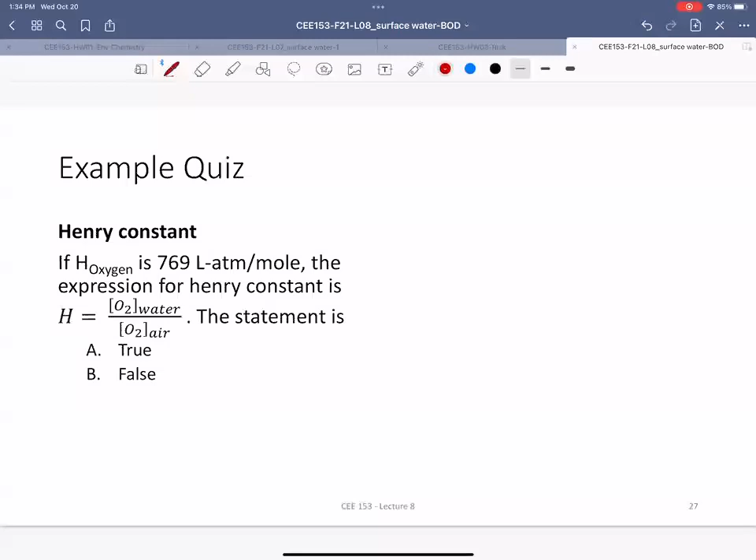So read these questions. If the Henry's law constant for oxygen is 769 liter atmosphere per mole, the expression for the Henry constant is this. So I'm asking, is this Henry's law constant dissolved concentration of oxygen in water to air, or air to water? Is the statement true or false? Based on the unit, you can predict whether this is water to air or air to water. So if it is true, then 769 liter... by writing that, you can see whether that's correct or not. So what is the right answer, true or false?

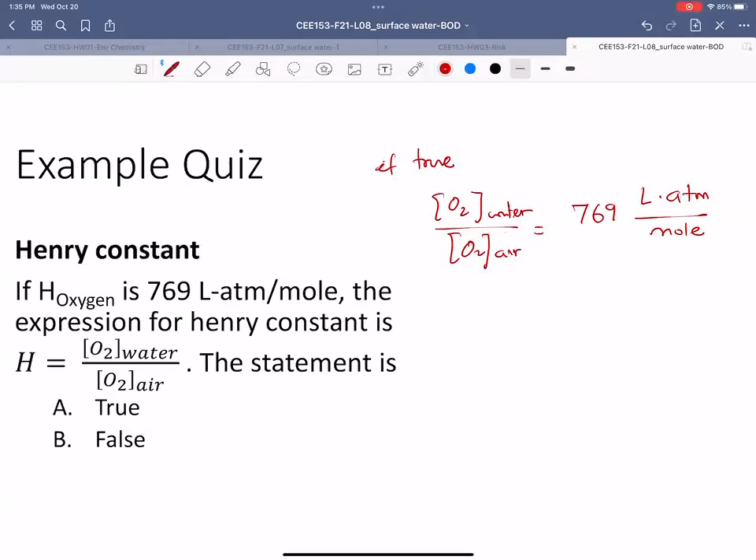50%. Okay, raise your hand if the answer is A. I'm not raising my hand, okay? I'm just asking you to raise your hand. Obviously, nobody raised a hand. Raise your hand if the answer is B. Okay, well, many of you didn't raise your hand. You still receive 0 if you don't answer any questions in the quiz.

But here the answer is false. So let's see why that is the case. If it is true, think of what the unit of atm is.

ATM is atmospheric pressure, is the unit of air. So if you write this one, you can write the same thing as ATM, mole per liter. Okay. ATM is a unit of concentration in air. So this is oxygen in air.

Mole per liter is water, right? Okay, most. So oxygen in water. So that means this unit is given as air per water, but I say this is water to air. So that means it's false. All right, next quiz.

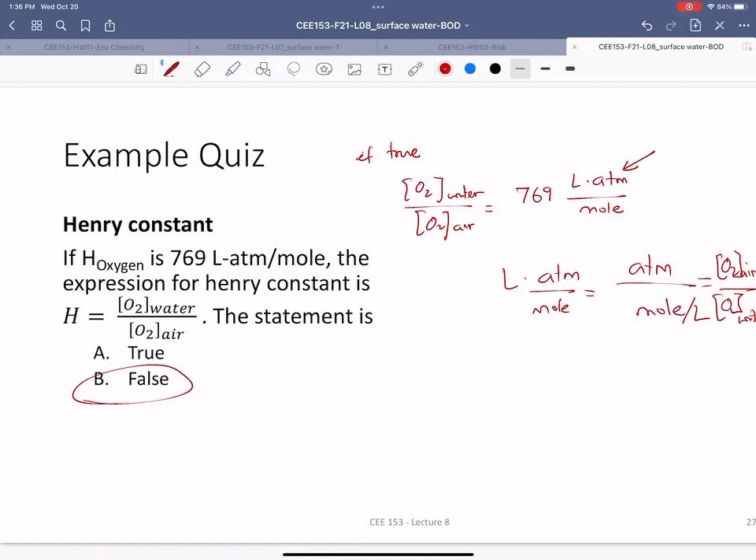So if you feel like the answer is opposite, feel free to share your thought process and we'll learn from it. And you also learn how to correct it. Okay, so it's very important to have this discussion. My goal here is not just to have the right answer here, but also know why there could be a wrong answer. Okay. All right, so

theoretical is basically saying that if you burn all the BOD, how much oxygen is going to go. But ultimate is how much of that BOD can be destroyed by microorganisms. Okay. So theoretical is everything, but ultimate is what of that whole thing can be done by bacteria. For instance, if you put a plastic, theoretical oxygen demand is basically if you burn that, whatever the mass of the CO2 it will release, that's the oxygen. But ultimate BOD is 0 because plastic cannot be eaten by bacteria. Okay.

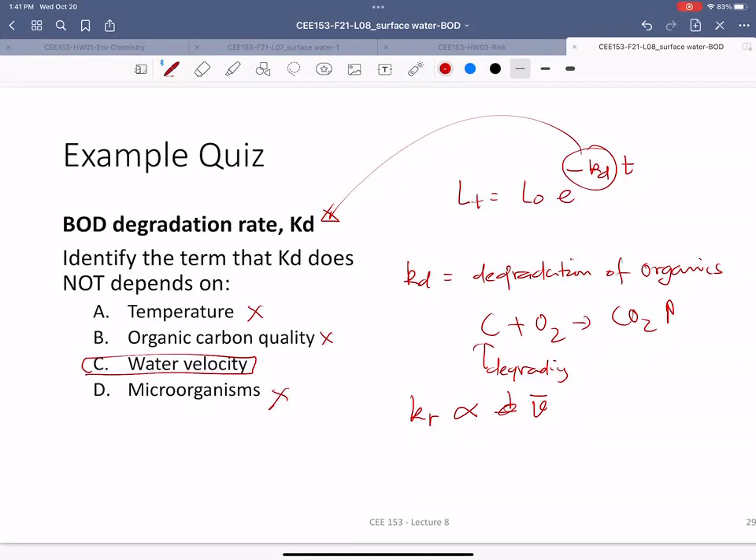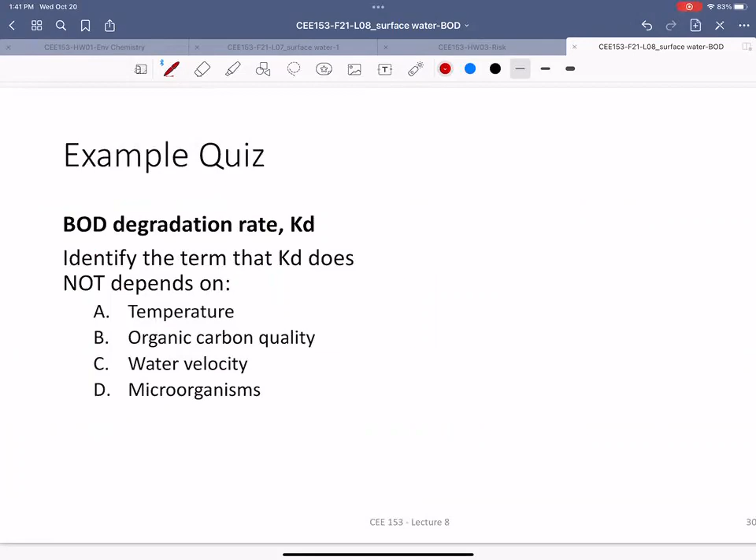Okay. Bacteria do not experience that velocity. They will just live in that one little bit. They're very tiny. So that's the reason why this is the right answer. Next question. Identify, oh, this is the same thing. I want to select this and do it. All right, another quiz question.

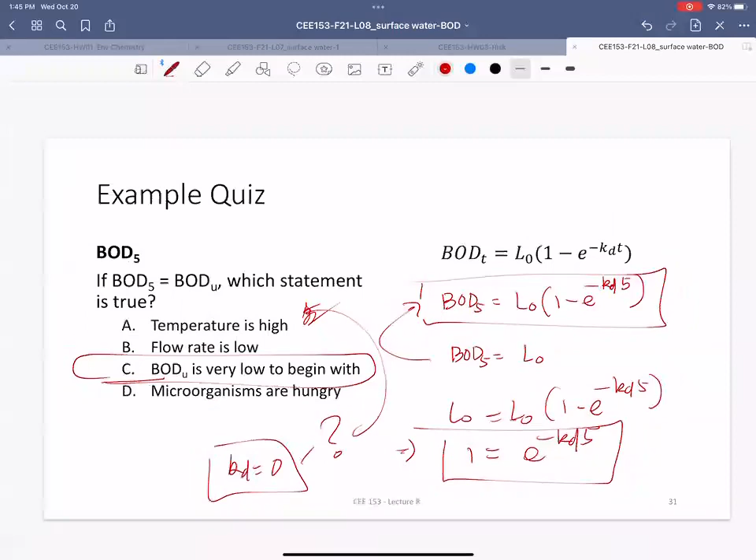Okay, so this is the last example. I'm not going to solve it, but I'm going to show how you can use this equation that we just learned to solve this question, because that's the last question you are going to solve in homework.

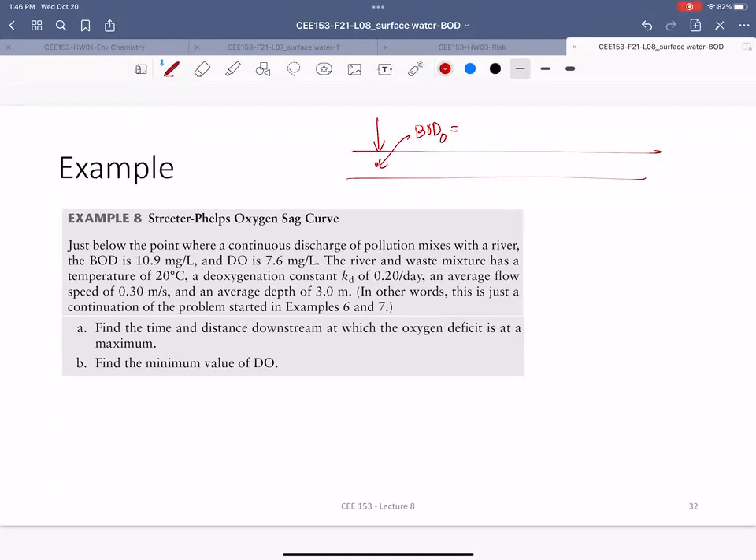Just below the point where the continuous discharge of pollution mixes with a river, BOD is 10.9 milligram per liter. So basically you are saying there is a river, the waste is dumped here, and after mixing, the BOD is 10.9 milligram per liter, and DO at the mixing point is 7.6 milligram per liter. The temperature is 20 degrees Celsius. Deoxygenation rate KD is given. Average speed U is 0.3 meter per second. Depth is given.

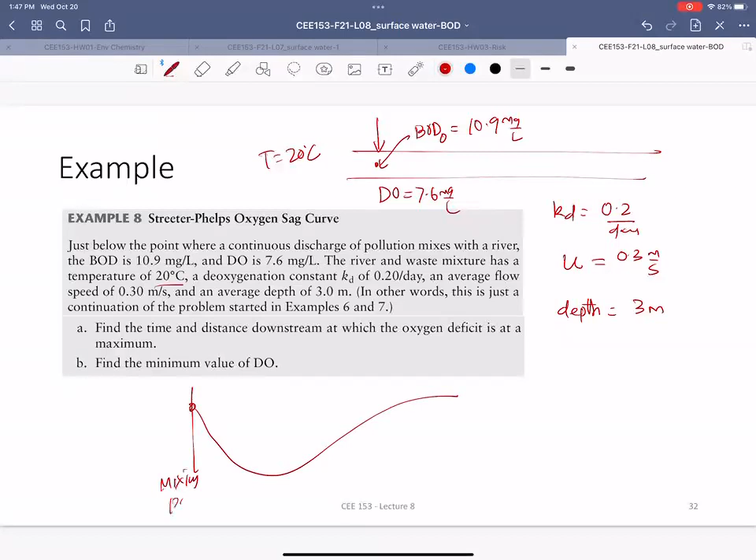All right, so it asks, find the time and distance downstream at which the oxygen deficit is at the maximum. Okay, so if you see that equation, this is the mixing point. The DO is going to decrease with time. And at some point, this is TC or XC. I'm asking at what distance downstream the deficit is going to be the highest. So from here, I'm asking TC or XC. Okay.

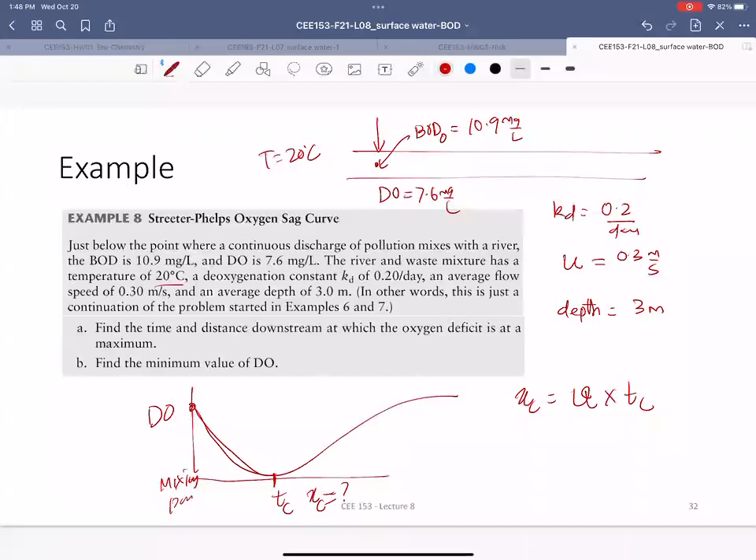XC is basically velocity by TC. This velocity over time is, hold on, something wrong. Velocity times TC. So if you know one of them, you can solve the other one. And TC, if you see this equation over here, TC is

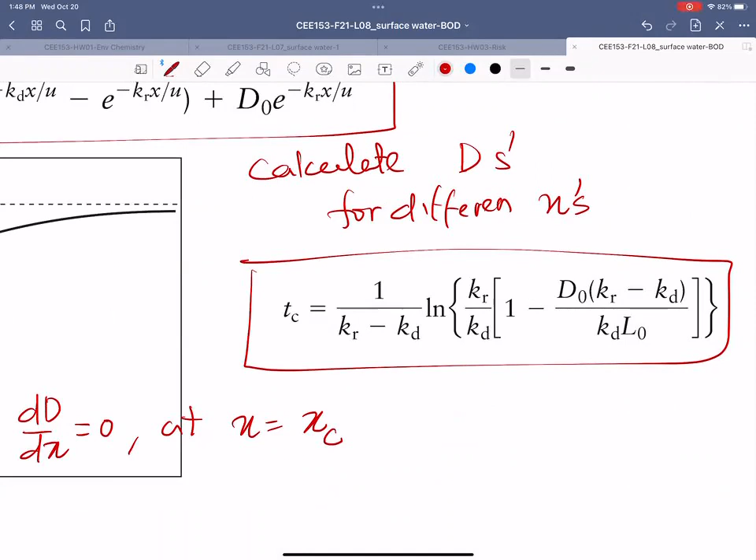this. KR, KD, everything. So everything is given. KR is given, KD is given, all of those are given to you. You calculated L0 in the previous questions. So you just plug those values and get the answers. Okay. So really there is nothing new here. Everything is given, you just calculate the value. So I'm just going to write it for the sake of it, so then we can leave.

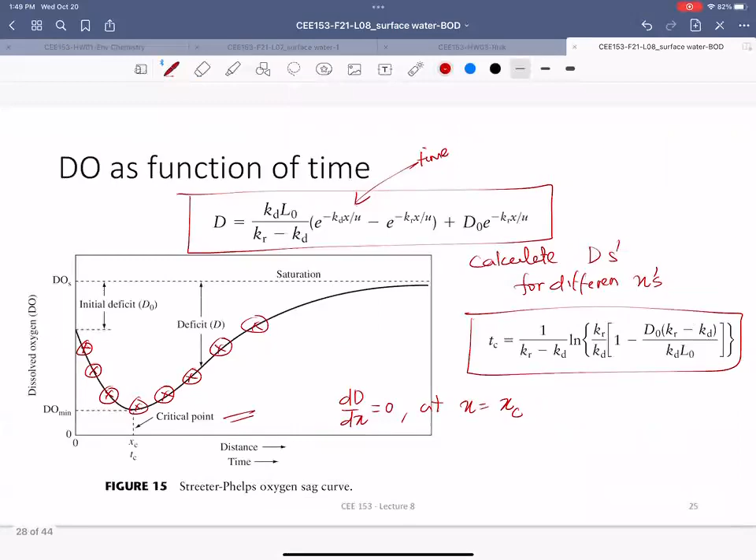Did any of you write these equations? KR by KD, it will take me a while. You know what, I don't have to write it again here. I'll write it after, before I put it up. But now you know how to solve all questions on surface water. Okay. And solve these example questions. These example questions will help you solve the midterm questions as well as homework. Okay.